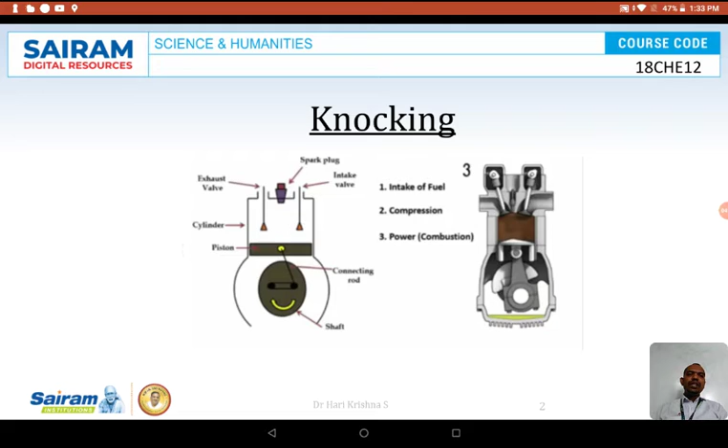So this occurs in a 2-wheeler, 4-wheeler, 6-wheeler, anything. How to prevent it and what the ill effects are, we'll see. Before that, there is a small video; we'll see how this knocking occurs and how to minimize this knocking. Okay.

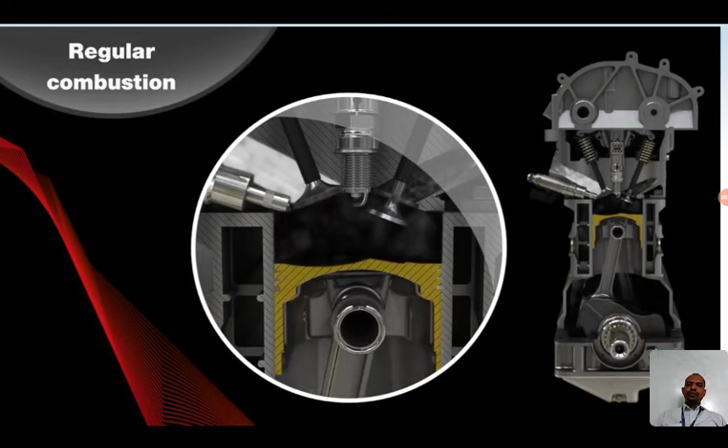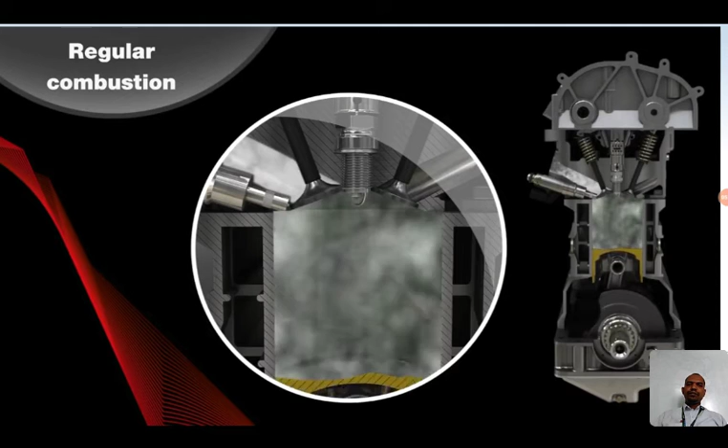So, regular combustion. Smooth combustion occurs here. This is smooth combustion. You can see on the right side, the fuel air mixture has come. The fuel air mixture is compressed by the piston. The fuel undergoes combustion. The outlet valve is open and it is going out. This is regular combustion.

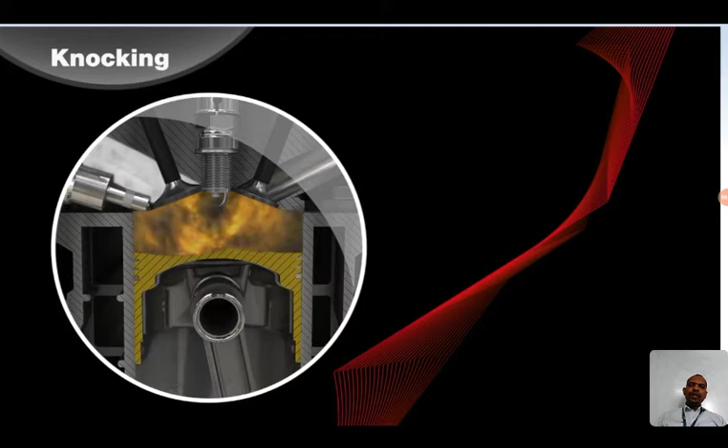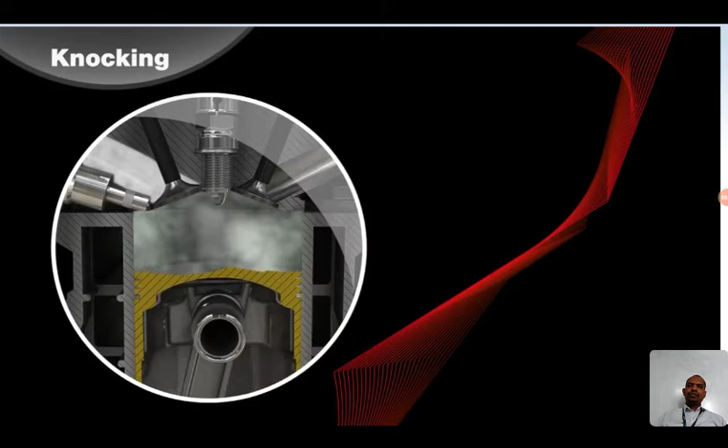In the case of knocking, here, when the fuel air mixture is compressed, it undergoes combustion itself. When it is compressed, the fuel undergoes combustion.

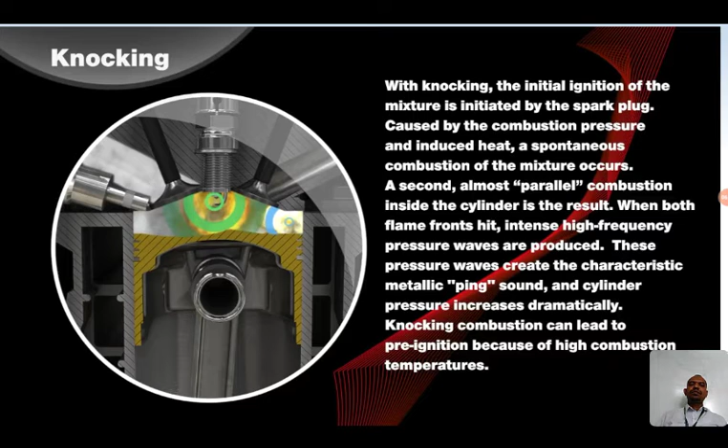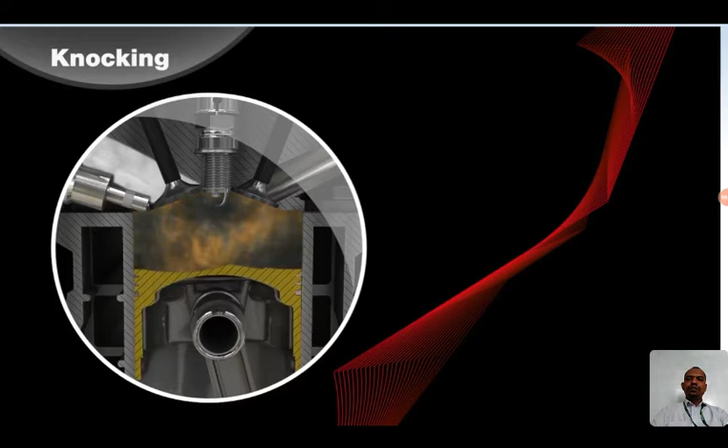It's very well animated. This is for pre-ignition. That is why knocking occurs, because of compression ratio. What is compression ratio? I will tell you.

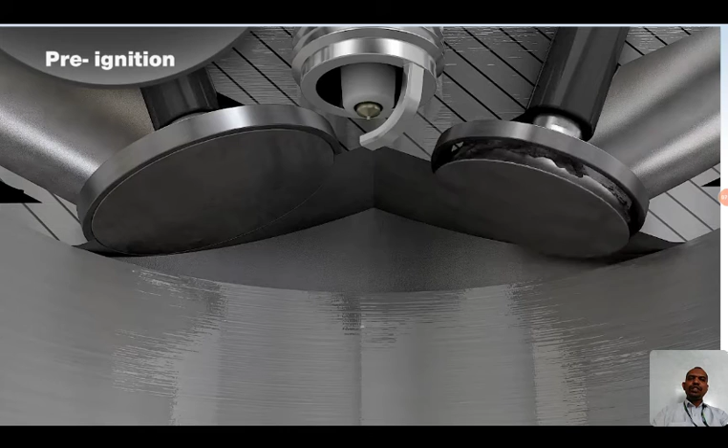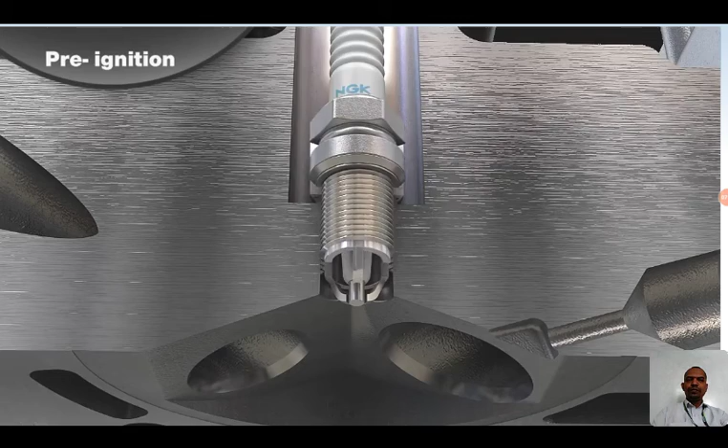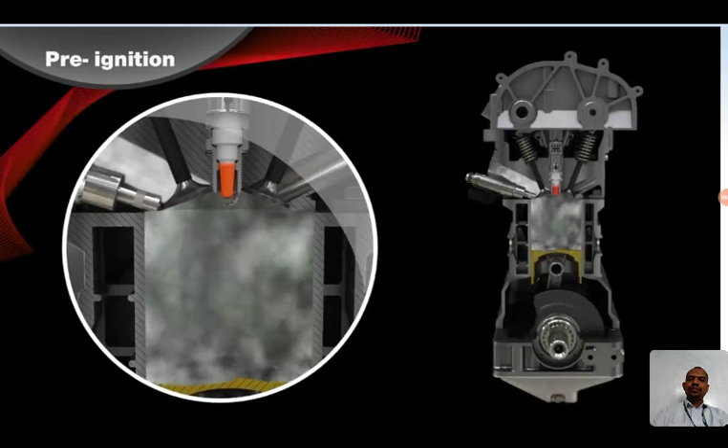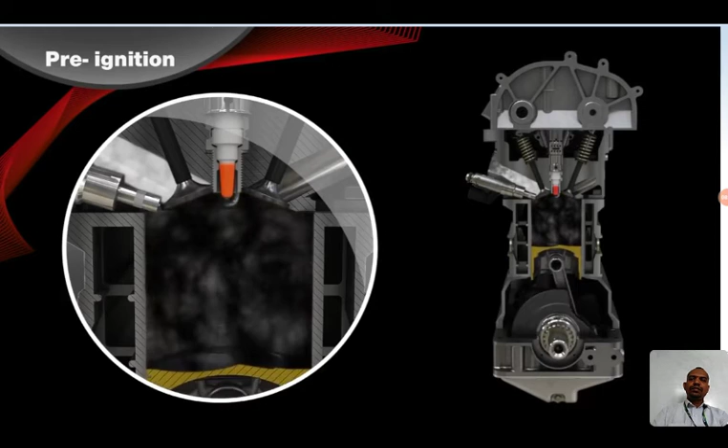Before the third stroke itself, ignition occurs in the second stroke only. When the fuel-air mixture is undergoing compression, at that time itself ignition occurs. It is called pre-ignition. Of course, you can minimize that by various methods. See, now pre-ignition does not occur. So tightening the torque, to some extent, reduces the pre-ignition.

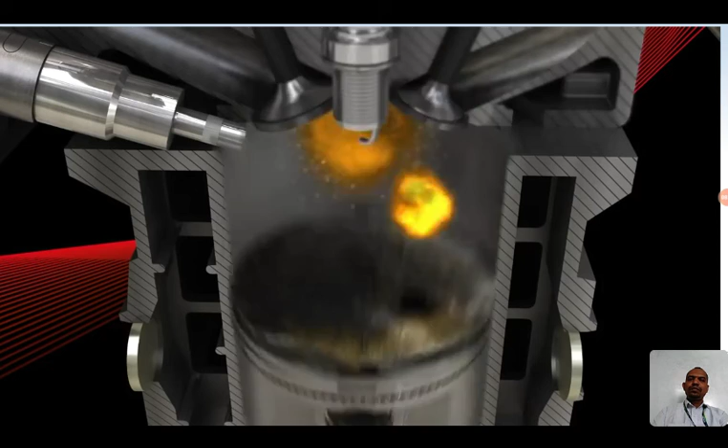This is regarding your ignition. Okay. So let us see why knocking occurs and what are the products produced during knocking. So why does knocking occur? Because of increase in compression ratio. What is compression ratio? The ratio of the volume of the engine before and after compression is called the compression ratio.

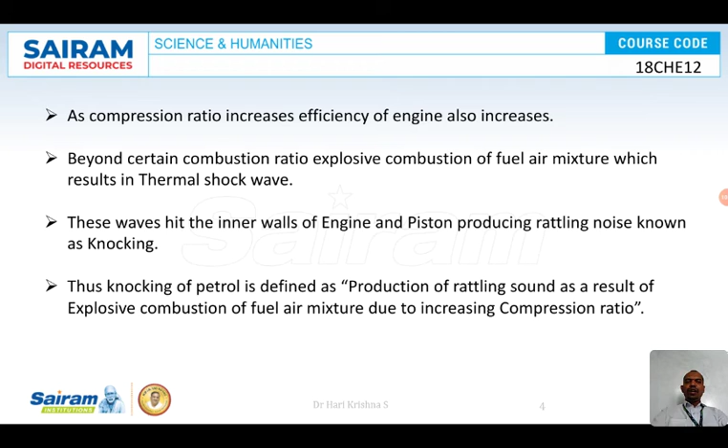As compression ratio increases, what will happen? Efficiency of the engine also will increase to a certain extent. Once a threshold is reached, explosive combustion occurs, producing various gases, intermediate gases, which hit the inner walls of the engine and piston, producing a rattling noise which is called knocking. Let us see what those gases are.

If normal combustion occurs in the engine, if we consider ethane as a fuel, the fuel undergoes combustion, and if all the four steps occur properly, then we get carbon dioxide and water. Then there is no knocking. But that is not the case in any type of vehicle; that is an ideal engine. So the fuel, as soon as it undergoes combustion, forms an intermediate. In the second stroke itself, fuel undergoes combustion and gives some intermediates.

So ethane undergoes combustion to produce dimethyl peroxide. This dimethyl peroxide again oxidizes to give acetaldehyde. Acetaldehyde undergoes further oxidation to give formaldehyde, and formaldehyde further undergoes oxidation to give carbon dioxide and water. These intermediates will be in the form of gases under high pressure. They hit the inner walls of the engine and piston with high pressure, giving a rattling noise called knocking. This is why knocking occurs, because of these gases.

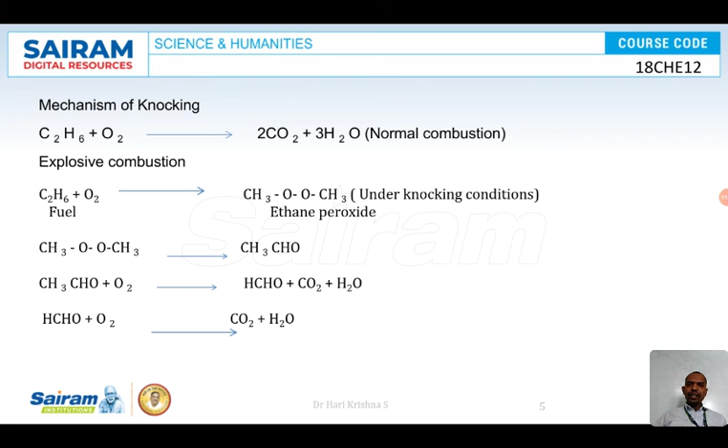I'm just knocking the table. You can see how much noise is produced. So just imagine the gas hitting the inner walls of the engine and piston. How much noise will be produced, right? So if knocking occurs, what are the effects? Because of this knocking, driving becomes unpleasant. It will give an irritating noise, isn't it?

It will cause damage to inner parts of the engine. These aldehydes will get converted to acids, and these acids will corrode the inner parts of the engine. Thereby, the life of the engine reduces. The output of the engine will be less, efficiency also will be less, and fuel consumption will increase. So these are the effects of knocking.

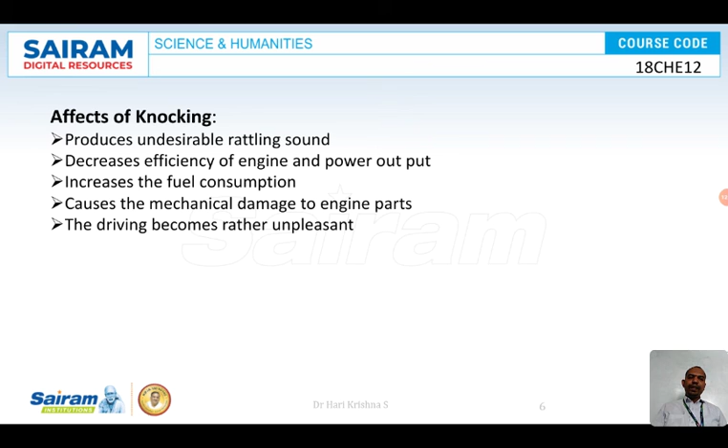So now, how to control knocking? The only way to control knocking is to maintain the critical compression ratio. If you maintain the critical compression ratio, knocking can be minimized. Once knocking has occurred, just as you add lubricants, you can add anti-knocking agents to the fuel to minimize knocking. What are those anti-knocking agents? We'll discuss that next. By maintaining moderate temperature and pressure also, we can minimize knocking. Okay. The next discussion will be about anti-knocking agents.